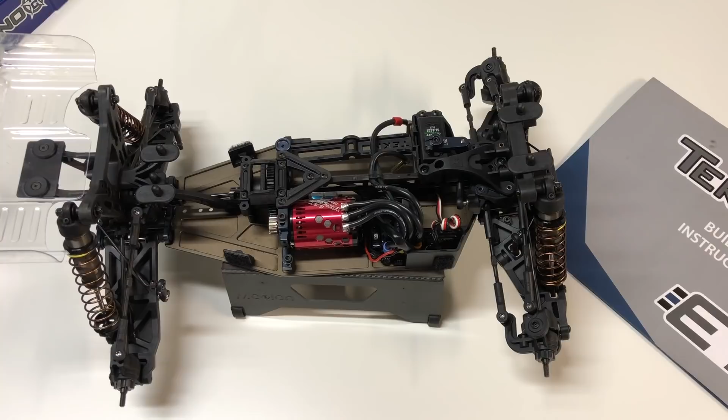Anyway, on my particular build I'm running a new servo, an Xpert SI4431 BLS, I guess a brushless servo. Sanwa receiver, little RX 481. Hobby Wing V3.1 stock spec ESC, so this is a 100 amp ESC, and then I actually decided to go with the 6.5 turn motor from my SC 6.1 and moved it over to this truck. So I had to grab a bunch of parts off different vehicles, like the aluminum servo horn off my EB410, receiver and ESC out of my TLR 22.4 2.0, and then the motor out of the SC 6.1. So it's just kind of the combination that seemed to work the best.

And as usual, just like the EB410, the electronics are very cramped. But having some experience with that kit, I already kind of understood the layout I wanted to put in. My EB410 took me probably half an hour, 45 minutes just to figure out how to wire it, and I just kind of modeled it the same way as my EB410.

So I wanted to give you my comments, thoughts, and maybe some of the things I didn't quite like about the build. But yeah, let's just get into it.

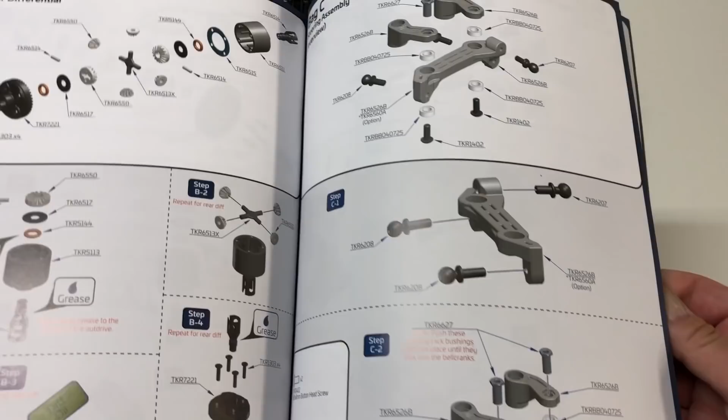So comments-wise, the kit build was actually quite good. I do like the Tekno builds. The instruction manual is really good, so take a quick look at that - ET410. The build pretty much is the same as the EB410, pretty much no changes. I mean they changed the shocks and shock towers and stuff, but everything pretty much builds exactly the same as the EB410.

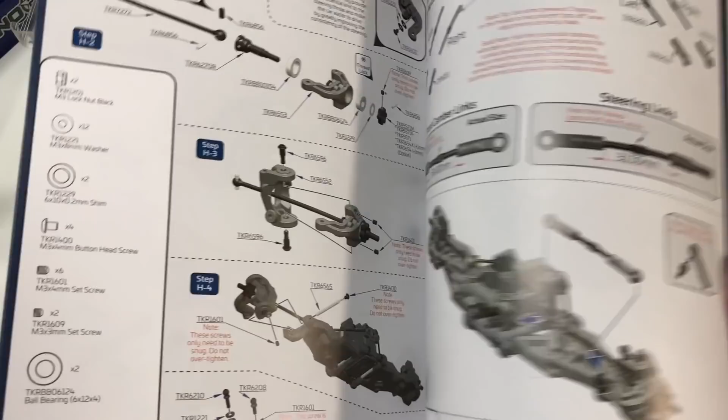So really nice, colorful instructions, very clear. Didn't really find any problems. A lot of text - actually made me think, I wonder if they make a different version for different countries with different languages, because there's a lot of text, a lot of instructions, a lot of tips, build tips, etc. As opposed to something like a TLR manual where everything's just sort of diagrams.

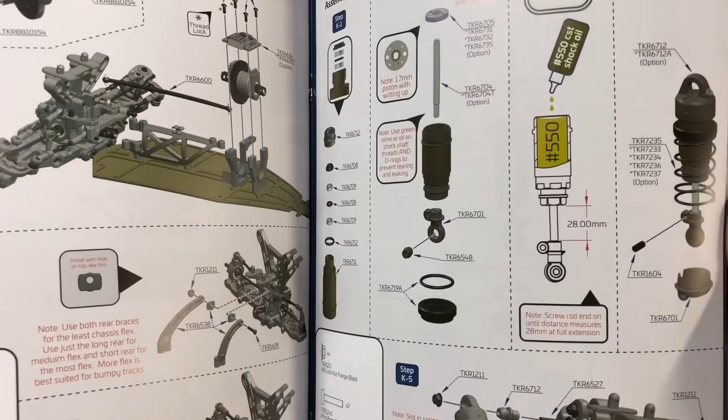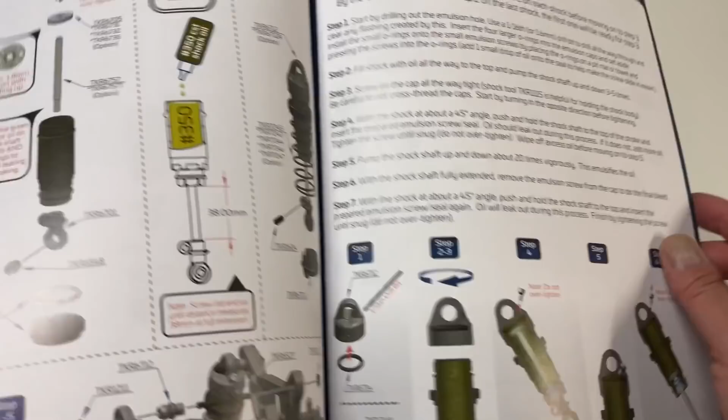So the only thing I didn't really like about the instructions, or thought was a little bit of a flaw, is that when you build the actual shocks, they give you all the steps, show you how to put it together, all that good stuff, but then they forget to tell you there's an O-ring that actually goes into the cap before you put it on. So they tell you step K4, put on the cap. They actually do mention it in the shock filling instructions, they show you that O-ring that needs to go in there, but when you're putting together shocks and just following it from the earlier instructions, you may wonder why you have an extra O-ring lying around. So that's the only thing I didn't quite like.

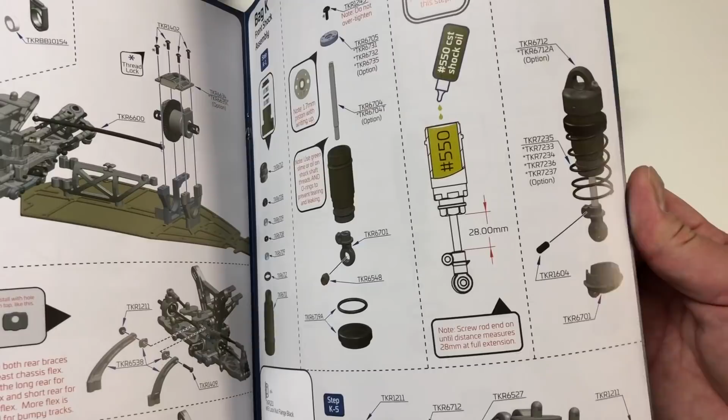As usual, they have a lot of nice setup information, instructions on how to use some of the adjustments and stuff. They have very nice parts drawings of all the different screws and washers and stuff, which are 1-to-1 scale, so it's nice to be able to refer to that as you're building the kit. And the other cool thing I liked about the way the parts went together is that they package all the screws together, so you might have something like a bag A or whatever.

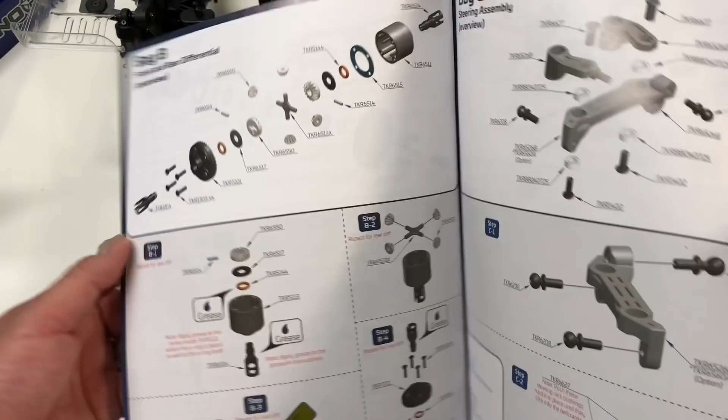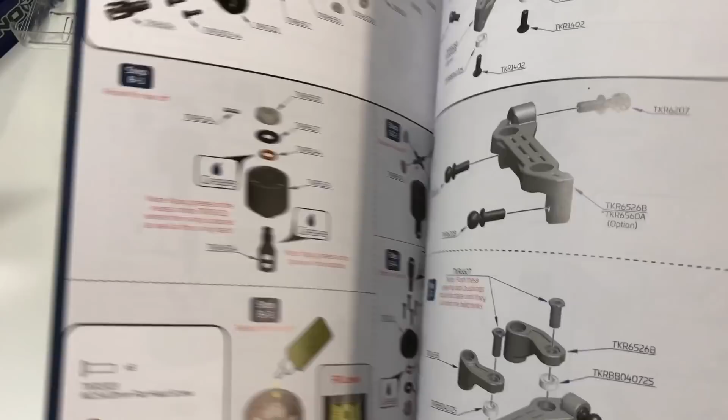If it's got different size screws, like an 8mm button head and a 10mm button head, they'll actually package the 8mm separately. So there are some parts where you might have two 8mm screws and six 10mm screws, and they're packaged differently. That makes it a little easier to find the right screws and make sure you're not using the wrong screws in the wrong place.

So anyway, that's pretty nice overall, I do like the manual. The build was pretty good overall. As I mentioned, most of the parts are in bags - actually all the parts are in bags, going steps A through M or whatever it is. And then about half the parts are still on part trees, about half are pre-cut for you.

That's better than the AE stuff, so I do like seeing pre-cut parts. Some things I noticed differently from the EB410 were the diff housings, or the diff cups - on the EB those were a little bit too fat, so it was hard to get them onto the ring gears or spur gears. These are actually molded and manufactured a little better, so they fit on nice and smooth, no issues there. There was a little flashing on those diff cups that I trimmed off with a hobby knife - not totally necessary, but just to make sure you have a nice, perfectly circular diff cup before you snap it on is a good idea.

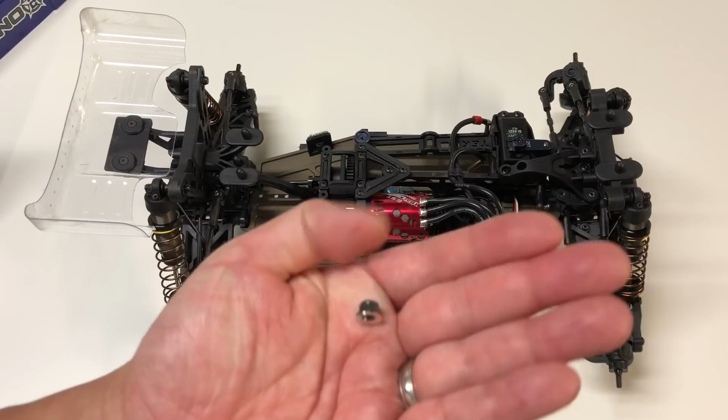So probably the only thing I really had to change or modify as the parts came out of the bags - high quality sway bars. These are pretty sweet little things. They actually have steel ball studs, nice molded links, and these 4-hole attachments for the bar itself. So the sway bars on this are really nice, high quality, really nice wheel nuts as well. That's an upgrade from the EB410 - these are their high-end aluminum serrated, machined wheel nuts, lock nuts. I guess they expect you to put a lot of power into these things, so you really want some nice lock nuts to make sure your wheels don't fall off and strip.

Any other issues I had? Well, one mistake - really my own mistake - inside one of these diffs I had two of the shims stuck together, and I inserted it into the diff, filled it all up, and then found I was missing one shim all the way at the end after everything was completely put together. I'm like, oh crap, where's that shim? So I had to drain the fluid and take everything apart. It was really user error, but as you put these things together, make sure you have all the parts in the bag before you actually assemble the diffs especially - that might save you some time and some mess. Just a quick little tip.

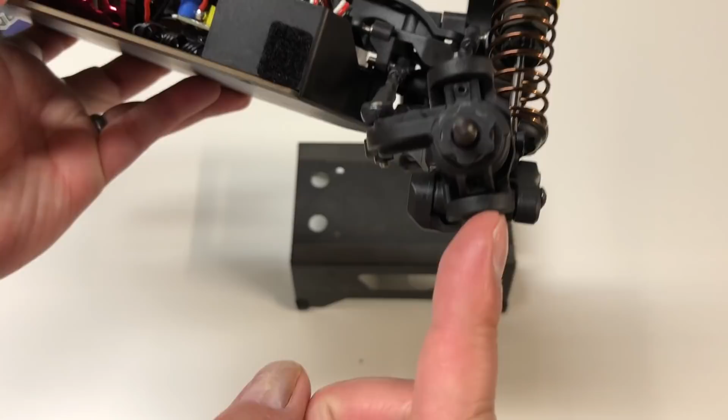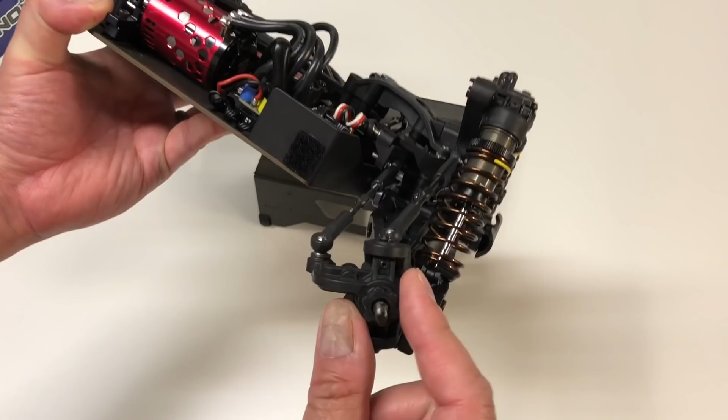Another thing - the kingpins, probably one of the trickiest parts to do. For these spindles there's two of them, one on the bottom, one on the top, but you've got to make sure these are threading in straight into the spindles, because the blocks and the spindles are at different angles. So as you're screwing these in, look at it from different angles to make sure that screw is actually going in straight - if it's off to the side, you'll notice it immediately. The other thing I'd do is put in one with a couple of turns, then start the other one and screw that in, just to make sure this thing is perfectly lined up within the caster block, and you're not trying to mount it at some weird angle.

So anyways, just a quick tip on that.

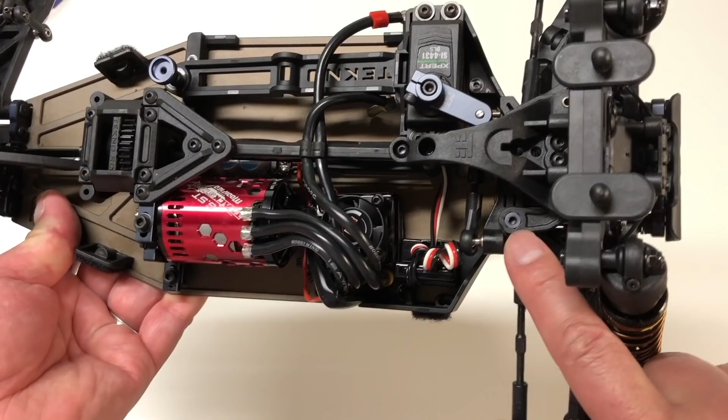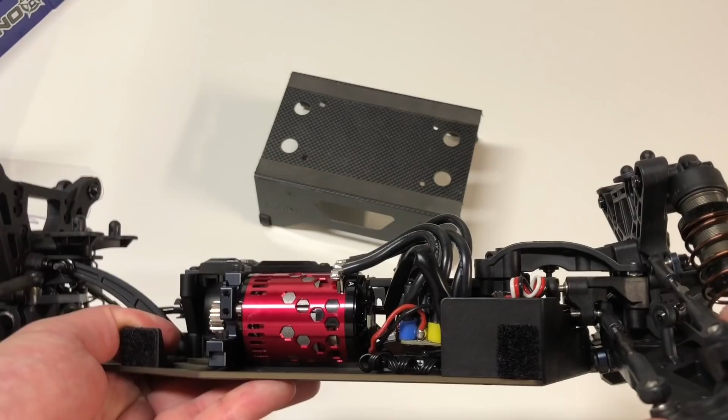Other things, these little bushings that go into the bell cranks, these hex aluminum pieces, go into the plastic bell cranks. These do need to be flush, so make sure you snap those all the way down. They should not stick up at all. Just put them on the table and press them onto a flat surface to make sure they were all the way in. I think some people had issues with stripping these if they crank down the screw too tight on the other end, so it's nice that they try to make them as tight as possible.

They actually say to put a little bit of glue on top. I didn't do that, but that is certainly an optional thing you can do.

Other mistakes I personally made, and it's nothing really wrong with the build, but the diff fluids are 30, 30, 10, and it comes with a 30 and 10K bottle. I assumed it was 10, 30, 10, because usually the center diff is a little bit higher than the front and rear, and the front and rear are oftentimes quite close. For example, in the B64D, that's how they run. But read the manual, it does say 30K, 30K, 10K.

I actually lowered that a little bit. I'm running about 25K in the front, just because 30 seemed a little bit high. Usually I run about a 2-to-1 ratio between the front and the rear, so 20K is probably about right. 25K seems about right to me, so maybe something you want to consider if you're building this from scratch.

The last thing is that the rear wing actually has cutouts for where you're supposed to trim them, but you've got to go beyond that. Because the shock tower is a little wider, these shocks stick out a little bit more, so you basically have to trim all the way up to the edge of the wing so that you get full clearance as the arms move up and down and the shocks move up and down.

So yeah, that was kind of my basic comments.

Other things I noticed, and I'm a little curious about, is that Tekno really doesn't make aluminum ball stud washers. So some of these spots, they crank on a ton of little ball stud washers - like here, I think it's something like 4 or 6 washers. There's some other spot where you got to put on 6. I guess they're half-mil washers, but why not have aluminum 1mm washers? Why do we have to put on 6 of these? Maybe it's a cost savings thing because stamping these are probably just punched out steel pieces, and that's probably pretty cheap to do. But everyone else has aluminum ball stud washers, so I wish Tekno did that as well.

The last thing I did was, the kit comes with right and left-handed hex screws for the shocks where they mount into the arms. I'm not using them. I actually ended up just grabbing both the right-handed hex screws and using them for the front, so they don't get beat up or dirt filled. Using hex screws on the front, fine - I'm using all right-handed threaded screws, and on the rear I'm just using standard button head 18mm screws. I did that with my EB410 too. I don't like those left-handed screws. I don't really like these hex head screws either, but at least on the front they make some sense. So I think Tekno went a little overkill with those. I've never really had screws unthread themselves from my shocks.

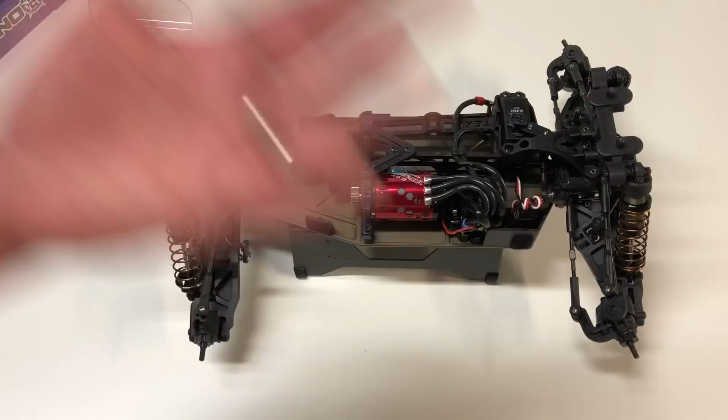So anyways, that's pretty much that for the review. I actually did get a chance to drive this. Initial thoughts: I ran maybe 4 or 5 packs today at my local track. A bunch of other people actually wanted to drive the truck, so I let them. It was a very popular truck.

Initial thoughts, it drives a little bit like the EB410. It doesn't seem quite as nose weight biased as the EB410, maybe because it's got the bigger body and fatter wheels all around. So I wouldn't be surprised if the weight distribution wasn't quite as upfront, so it drives a little more neutral. The kit setup I thought was really, really good - probably 90% there as far as I can tell. I'm going to be making small changes here and there, but overall kit setup was quite good.

Pretty happy overall, it lands super plush. The big fat tires with the big fat foams make the truck land quite plush. These shocks are obviously larger than the EB410, so it just jumps and lands quite plush. It does nosedive quite a bit, so I'll probably work on adjusting that a little bit. But overall, the kit setup was quite good. Very, very fun truck to drive.

Probably the most fun RC car I own right now. If you're just looking for something to mess around with and have a lot of fun, it jumps and does crazy things in the air. It has tons of traction, it lands really well, you can throw in a lot of power. So very fun truck overall, happy with it so far.